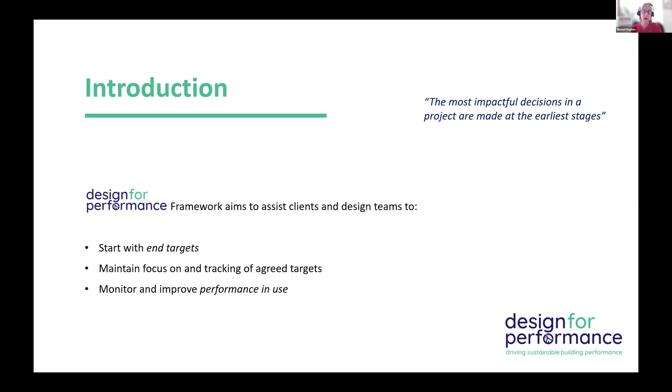By way of an introduction, the project is essentially about building performance and making key decisions at the earliest stages in order to set targets and have a considered approach for focusing on tracking, monitoring, and improving those performance targets for the full life cycle of a project.

By way of overview and introduction to the Irish Green Building Council, of which I am Director of Innovation, Irish Green Building Council have carried out a number of research projects and advising the construction industry and real estate sector on sustainability in the built environment. Some examples of our projects are Zero Carbon Roadmap, Building a Circular Ireland, which we just launched last week, looking at the circular economy side of the construction sector, and National Roadmap for Upskilling in terms of how we're going to meet our targets.

By way of delving deeper into the work over many years by the RIAI, as Kathryn advised, there's been a suite of sustainability advice, policy and guidance documents delivered by the RIAI, which concluded with the RIAI 2030 Climate Challenge and the accompanying suite of advice notes. All of these documents are available on the RIAI website. And this journey of addressing climate action and sustainability targets has now moved into this next stage of this Design for Performance project.

Focusing on the RIAI Climate Challenge, for those not familiar, the project has taken a life cycle analysis approach and focused on 4 key indicators. As Kathryn advised earlier, this includes embodied carbon, operational energy, water, and health and well-being, which is a combination of indoor air quality metrics. The goal with the 4 targets is to look at each individually, set a reduction target, and see how to achieve those targets.

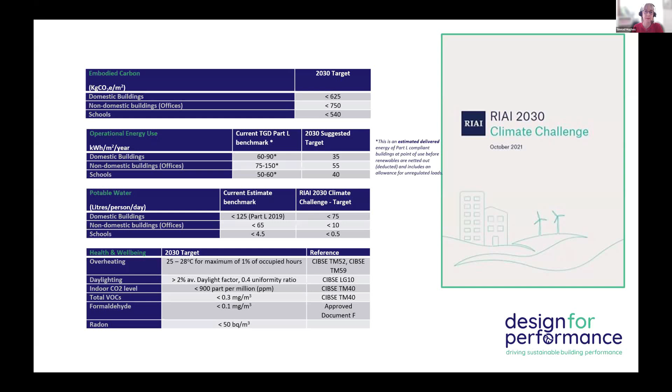So what is the Design for Performance framework? Essentially, the RIAI and IGBC have taken these 4 metrics and looked at them in further detail. The title was deliberately selected to encourage industry to move beyond designing for compliance only, and to look at the broader performance and actual building performance of a property.

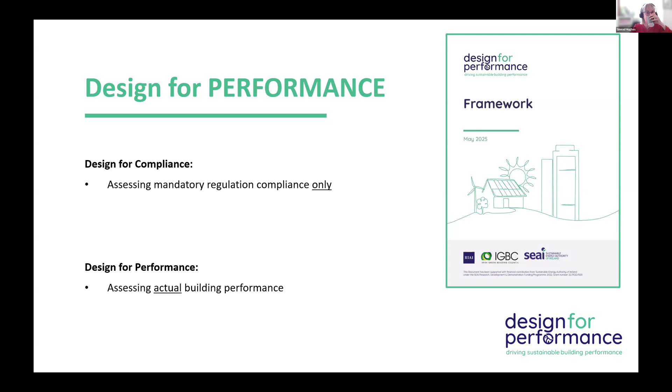In addition to the metrics within the climate challenge, we've also considered the EU Level(s) framework. For those not familiar, this is a European approach to asking the right question from the outset, looking at life cycle assessment and assessing the sustainability performance of a building. Again we're looking at the same 4 metrics from the RIAI Climate Challenge, in more detail at level 1, the early stage consideration; level 2, the more detailed design; and level 3, the as-built and critically the in-use performance aspect.

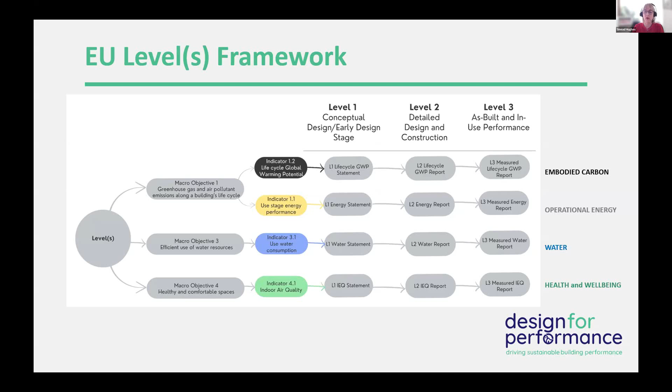Sarah later will go into more detail on the EU Level(s) framework. Essentially we're trying to bring a broader awareness to this overarching European framework in which we'll all be operating, with further detail to follow.

So what is the Design for Performance framework? Essentially it is 3 documents. We have done extensive research to see what is the most applicable way of conveying all this information and assisting industry in a project-specific approach, balancing broader-level advice while accepting that every project needs to be looked at on a case-by-case basis.

The first document is a work stages overlay. We started with a typical construction project, looked at the detailed stages, and critically who does what when. We have a guidance document, a Word document, to delve deeper into the specifics of the 4 indicators at each stage of a project. Then we have a dynamic tracker, an Excel document, suggested for industry to use and tailor to their own operations or to tie into other internal documents and processes. So that is a movable item.

I'll just talk you through briefly those 3 documents. The work stage overlay takes its lead from the RIAI Design for Manufacture and Assembly document, the DFMA report, which I'd urge you to look at, which looks at the work stages, currently 8 stages in an RIAI contract, and various metrics within each. We acknowledge the differential between public and private contracts, design build versus traditional, large projects versus small, residential, commercial, new build versus renovation.

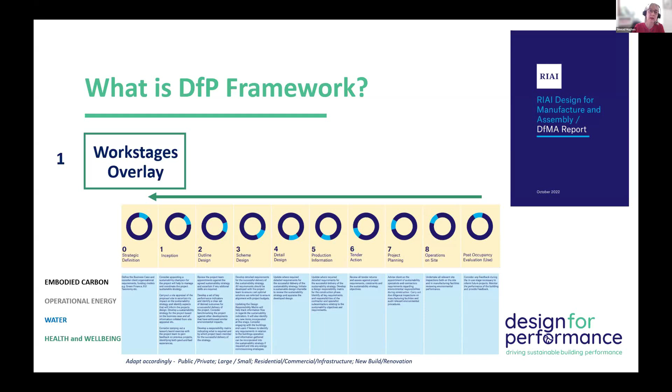The framework is a guidance document, essentially a word-by-word version to assist you in pulling together all of this information and understanding what is specific to your project and how to improve upon same.

And then finally, the dynamic tracker. Essentially, this is an Excel document on an indicator-by-indicator basis for you to look at the key action at each stage and assign responsibility in terms of having lead and support.

As Kathryn said, collaboration is key. We're delighted that the training sessions today are open to anyone in the construction industry, because this is key. We have huge climate targets to meet, and we really need to expedite this process and deliver in a faster, more efficient, and more collaborative way.

We acknowledge that there are certain risks and equally opportunities through the lifetime of a project's development, and it really is about monitoring and tracking those metrics and processes within that overall life cycle lens, and that is key. Just showing you a very high level overview.

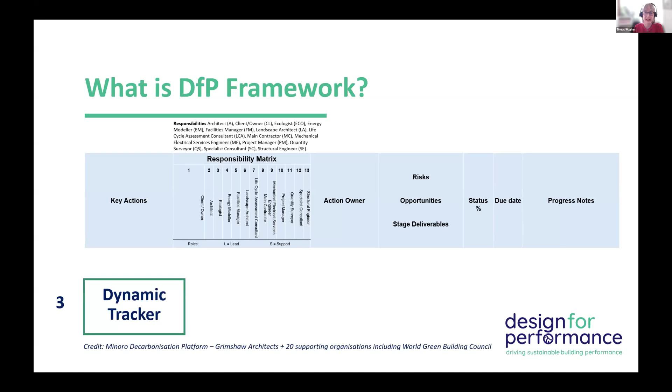The actual detail within the dynamic tracker - we wish to credit the Minoro decarbonisation open source platform information, which was designed by Grimshaw Architects and 20 organisations, including World Green Building Council. So, in the true sense of collaboration, we're not reinventing the wheel across the industry at a European level. The detail will be apparent within the framework when we go into that.

What are the benefits? The benefits are multiple on so many levels. Essentially, this is about target setting as early as possible and tracking that journey and continually improving, and seeing the benefits of a full life cycle analysis.

It's tracking, it's monitoring, it's verification. So collectively, we're looking at full performance life cycle analysis of a project.

Where to start? I know there's a huge amount of information, and this is a very high level overview. There's a wealth of detail in the documents to come, but essentially just start simple, start sharing, start learning, upskilling, doing courses. Even attending today - we're so thrilled to see the numbers attending.

Tracking the metrics, looking at your existing projects, tracking the metrics, collaborating with your design team, your clients earlier in the process. So really the metrics around each of the elements are continually on the table for continual review.

Really, it's a culture of collaboration. That is what we're trying to promote here today. So I'll leave it at that, Liz, and we can delve deeper into the documents next week.

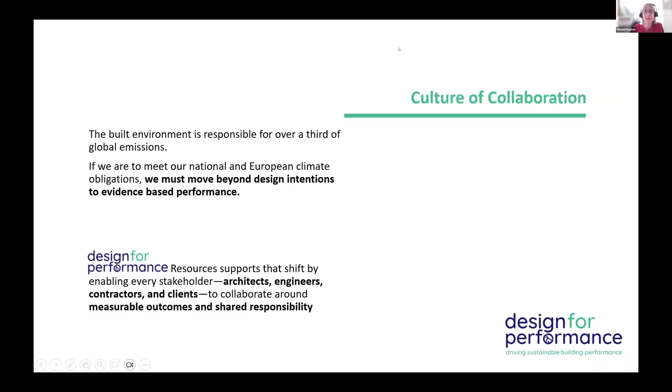So we're going a little bit deeper. I'm going to introduce Judit Kimpian, and the title of her topic is Beyond Compliance, Why Design for Performance. But before Judit starts, I'm going to give you a little introduction of who Judit is.

Judit is an architect and policy expert renowned for shaping EU sustainable building policy, with 20 plus years in architectural practice and as former Director of Sustainable Architecture at AHR. She has led pivotal research in building performance and net zero architecture. Judit chairs the Architects Council of Europe's Sustainable Architecture Group and contributes technical guidance to RIBA and CIBSE.

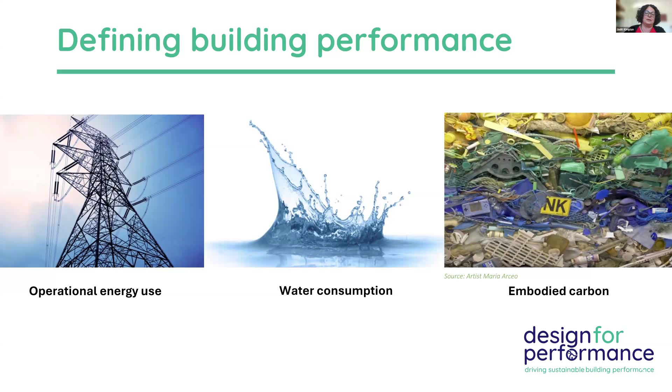And then what we want to see really is the quality of the built environment and the value that we create with these resources and at what cost.

And we want to be able to communicate all of this over a building's lifespan, effectively tracking from product stage to construction stage to use stage, end of life, and beyond in terms of recycling and reusing.

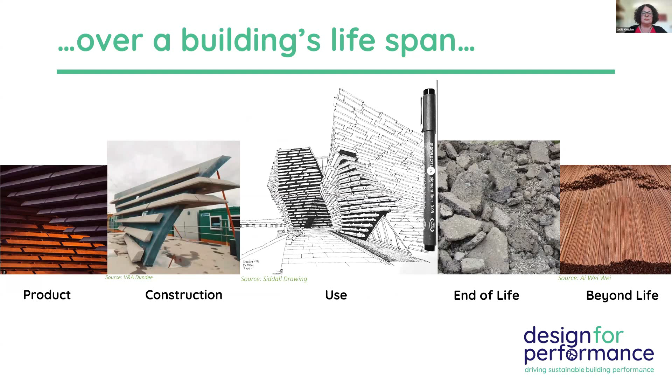There's a less visual presentation of this approach translated in the macro objectives and indicators of the Levels framework. Over the past decade, a lot of effort has gone into capturing these indicators.

So we really try to select the ones that have the greatest leverage, that by recording, monitoring and targeting specific indicators around these, we really incentivize sustainable design practices.

These were drawn from different sustainable design certifications and standards, but today Levels is really recognized for providing a common language for assessing and reporting on the sustainability performance of buildings. And Levels also underpins many EU policies and directives, including the Energy Performance of Buildings Directive, the CPR, the taxonomy.

And Design for Performance is very much based on this Levels approach to reporting environmental impacts. Sarah and Gary will both speak more about this in their talk.

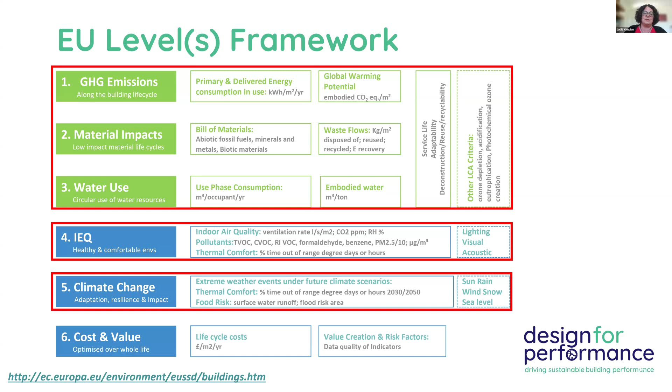So that's the resources that we're tracking against the indoor environmental quality, the climate change resilience, and the life cycle cost and value creation.

A1 to A3 is the product stage, then the construction stage - these two we call the upfront carbon - and then the use phase and the end of life phase.

So these all relate to the material and construction impacts, whereas the bit in B6 and B7 is the operational energy use and operational water use, which relate to the actual operation of the building.

Sarah is going to speak a lot more about this, but it's really important to have this in the back of your mind when we're talking about whole life impacts.

In terms of the breakdown of embodied carbon, it's really good to understand where these big impacts are. So usually we say that A1 to A3, the production phase, so the upfront carbon, tends to account for more than 50% of whole life carbon.

All of these figures are based on collected data, and we really emphasize over and over why collecting data and tracking these is so important, not just for the sector, but for individual projects. B2 and B3...

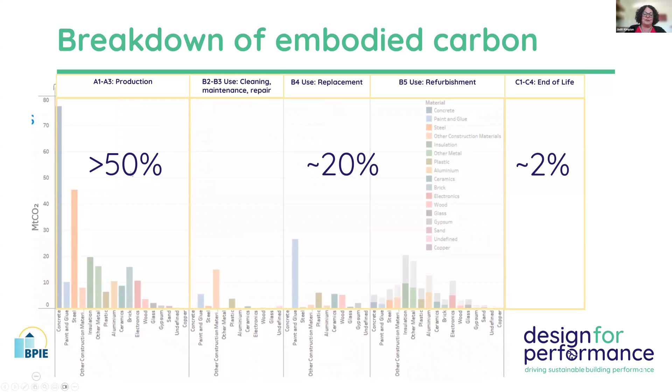Again, it's worth reinforcing the terminology briefly. Whole life cycle usually considers the environmental impact of a material or product over its lifetime, from cradle to grave. Module D, as I stated before, includes reporting on impacts relating to the reuse and recycling of materials and products, often referred to as cradle to cradle. When it comes to carbon, neither embodied carbon nor whole life carbon includes module D, so that's worth noting. The Energy Performance of Buildings Directive does require reporting this, but there are no limits associated with it.

The aim of the circular approach is to achieve zero waste over the life cycle of a building, reusing and recycling all the waste. Ideally, with sufficient design input, one project's waste can become another's resource, eliminating the need for costly production of new materials as well as waste.

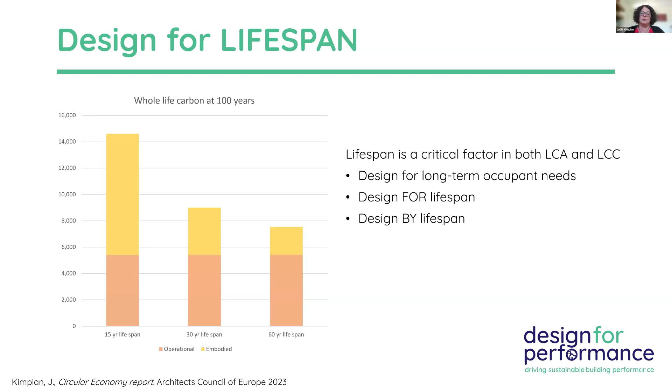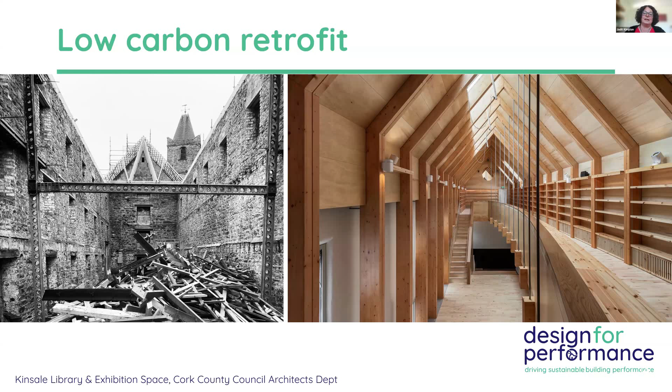My colleagues will be talking about this project in another module, but it's great to see built examples in Ireland showcasing the principles of design for performance, a fantastic project in Cork. Another great example is the deep retrofit of Tom Johnson House, the new headquarters of the Department of the Environment, Climate and Communications, undertaken by OPW Architectural Services. The achievements will be discussed by Edel Collins of the OPW on day 3.

Now I'm going to talk a bit more about operational energy use and related carbon emissions. This is the B6 emission stage that has sparked the most controversy, which has led to the development of another key aspect of design for performance: a move away from estimating energy efficiency potential of buildings towards targeting achieved performance in use.

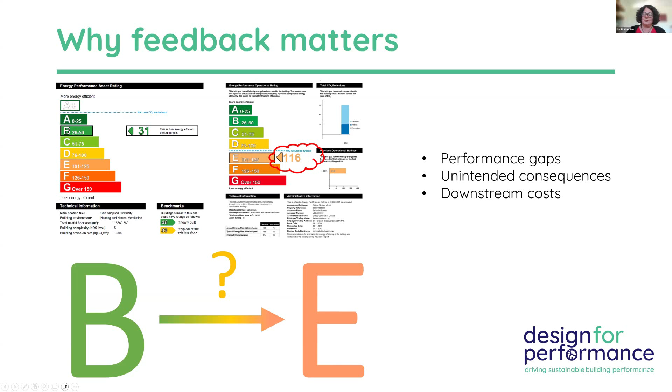So what you see on these two pictures is an energy performance certificate versus a display energy certificate reporting the operational rating. We found in the 2010s that there is a large discrepancy, and we started looking at the causes of this. What we realized is that in order to create these certificates, the industry didn't really want to be responsible for what we call user behavior - what equipment people put in buildings, the as-built factors, the operating conditions, occupancy patterns, hours of use, etc. So a kind of notional building was created for legislative compliance, which is a building under standardized conditions.

But what we found in the UK, and also in Ireland, is that these methodologies defining the energy performance certificate and the calculations - the DEAP and NEAP calculations behind them - actually don't relate to outcomes. And that's a really big issue.

I think what's fantastic is that the emergence of the Internet of Things has allowed low-cost wireless sensors to begin monitoring buildings in more detail, and doing this verification loop has become really financially feasible. More data is coming out about not just the performance gap, but ways of closing this. In this case, the data showed in the AMBER study that the schools analyzed had a performance gap of around 20%.

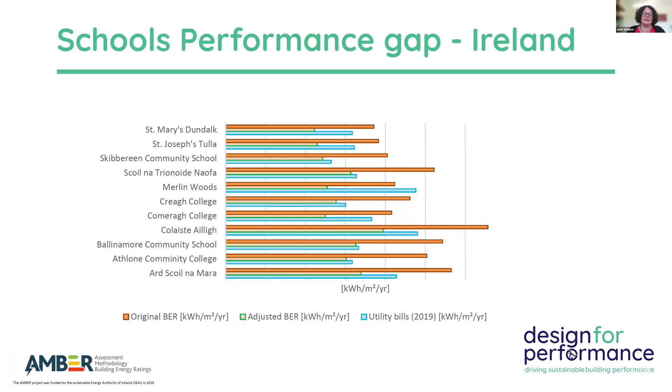And yes, it's worth analyzing the causes of that - I'm going to show a few more slides after. I just wanted to show you this other Irish study, Mind the Energy Performance Gap, which was testing the accuracy of building energy performance certificates in Ireland, showing a similar gap - really a lack of relationship - between the calculations and actual performance that was modeled to represent actual building conditions. That's kind of unsurprising, but it shows why it's so important to get a better handle on what actually happens in buildings.

One way of doing that is operational stage evaluations. So you do occupier surveys, building visits and interviews. You read the meters and sub-meters, ideally try to reconcile them, especially if they work well - not a common occurrence in my experience. You can also log quite easily indoor environmental quality meters, and what I do on every single project is thermal imaging, and of course blow door tests are mandatory.

But there are other instruments for building fabric checks too, so you can demonstrate whether the U values you designed and intended were actually implemented in the project. There were a number of research projects across the EU and the UK, and now best practice is considered to involve an as-built as well as an in-use check to effectively close this feedback loop.

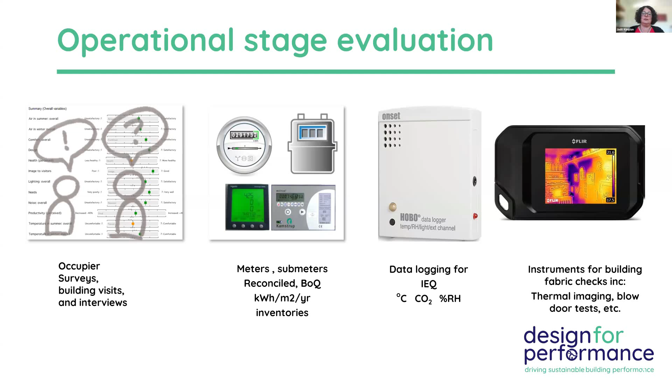So this is a quick snapshot of the RIAI's guidance, which shows that carrying out an as-built validation - as Sinéad said before - of how your employer's requirements translated into the build project is also a really good way to address any performance liability issues.

And so these as-built checks don't only help with quality control at handover, but they also ensure that the performance measurements you then do in operation relate to the actual building as constructed, and not the design - again helping with any liability issues, which are actually quite rare.

So crucially, because the commissioning is late on most buildings, the first year becomes the year of seasonal commissioning and adjustments. This is very common, especially for larger buildings, but not uncommon for homes either. And this is when the meters get reconciled, where all the set points and profiles are checked and adjusted, the openings are serviced, the manuals are finalized, and all the as-built information gets consolidated.

In the standard D&B contract, this period is usually extremely chaotic, and things often get missed, resulting in building underperformance. If outcomes form part of a contract, most of the issues are more likely to be rectified without adversity. This has been our experience on projects that have adopted this approach.

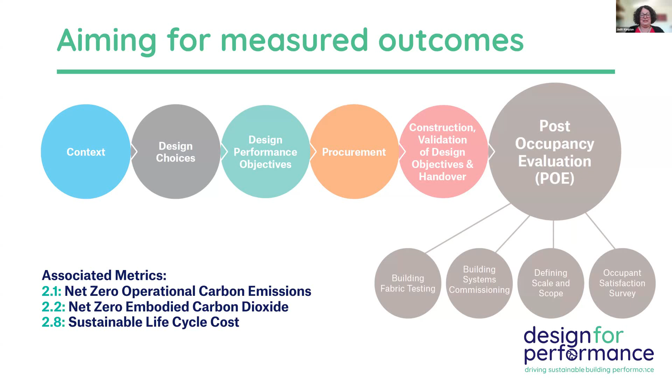So just to look at what these metrics mean in practice, and who is going to pay for all of this. Whenever I talk about this topic, I always emphasize that actually the question should be, why would anyone not pay for this evaluation, especially when they are planned in from the start of a project, so you don't spend a lot of time having to collect material data and information that's difficult to access, because you've prepared it upfront.

We know that without verification of the as-built and in-use energy and carbon metrics, buildings routinely underperform, and clients ultimately have to meet the extra cost of unused and underutilized equipment. This could be metering, building management systems, sensors, controls - sometimes amounting to between 2 to 5% of capital cost. It's a lot of things not to pay for, but not see the benefit of.

There's also the misplaced value engineering - fabric performance, air tightness, all the openings, floor to floor heights, thermal mass, entrance lobbies. All of these things, if they make a crucial contribution to the final building, and are value engineered ad hoc, that will compromise performance. And there are always increased management, maintenance, and energy costs.

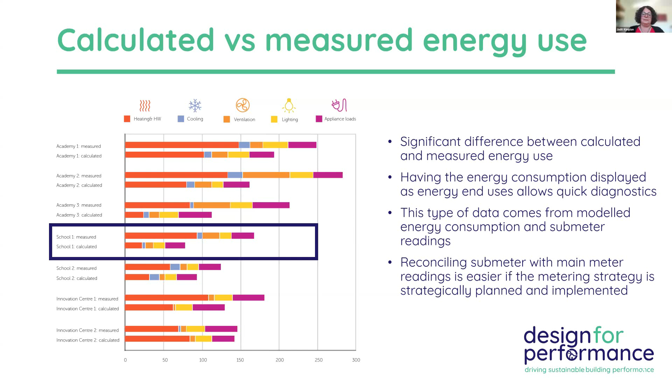I think what this offers is that you can have really quick and important insights. For example, the building highlighted there had really significant issues with heating and ventilation, and so we can start drilling down into what didn't work on those projects, on that particular energy end use.

And so learning from the projects that didn't work, for our next project, we worked really closely with UCL, IEDE, Institute of Environmental Design and Engineering. You might find that teaming up with academic partners at the start of this journey is really helpful, taking projects and building aspects of them offline. But what we just did a live project because we so wanted to see this work.

We embedded performance basically from the start of the project all the way to completion, and well into the defects liability period reporting. We basically set up a kind of golden thread of information. We called it the building performance register, where we don't just track the metrics, but also what kind of aspects of the design allowed the project to meet those metrics and limits.

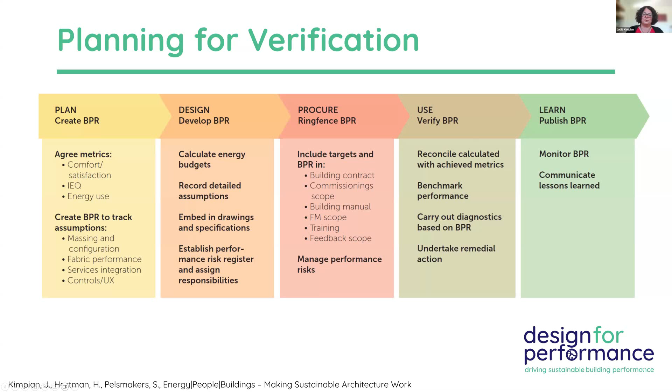From design all the way through, we ring fence it in the building contract, the contractor's prelims. It informed the FM scope, and then when you're in the use phase, you use it to verify that your targets have been achieved. It's very helpful when you want to do reports about what worked really well, you can go back to that same structure. So it creates a golden thread of continuity through the project, whereas normally in a more adversarial project setup, a lot of that information gets lost in the fray.

So we effectively follow this design for performance approach on the Civic Centre in the UK, working closely with the client to target an operational rating of A, which means measuring energy use, and we aim for less than 70 kilowatt hours per meter square per year for annual consumption, with about half of that offset by renewable electricity.

And what we found was that even with this approach, the building ended up consuming a third more than what we estimated in the first year, which is actually a really common occurrence. So you might find that 130% more of a low is still relatively low, but the discrepancy was high enough for the design team to take steps to address this performance gap during the defects liability period. The advantage was that all the key protagonists were still engaged and involved in the project.

So just very quickly, we started with a simple review, just collecting bills and certificates and interviews, visiting the building, reviewing its use and operation, discussing with occupants to gather feedback on what has and has not worked well. Occupants may also share their energy bills for review by the design team. Issues to review can range from systems to materials to occupancy patterns.

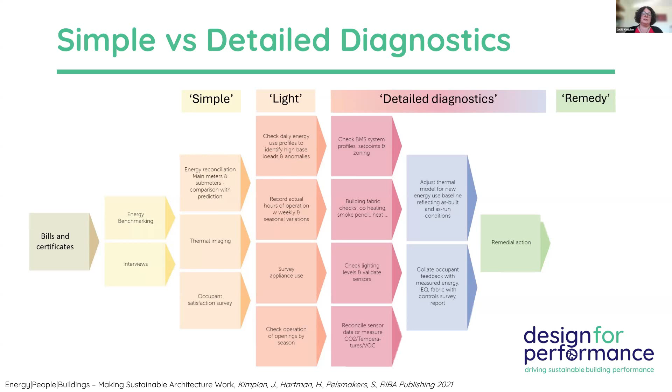I think the themes and issues to review should be really set at the start of the design process. And then if you find any major discrepancies, which we did here, then you look at the performance figures more closely, and you might want to engage an independent consultant to do this as per the RIAI's guidance. But we didn't go down that route because we had UCL's researchers working with us, which was super helpful.

But what we did do is go after the submetering data, so this energy end use data really early, and combined with the feedback received from the occupants, we could start the diagnostics very early on. And we could almost immediately see from the comments and from the energy results that basically the automated windows for night purge needed adjusting, they were opening too much in the winter, not enough in the summer. And the lighting controls needed adjusting. You can see here from the energy figures, the heating and the lighting were way out.

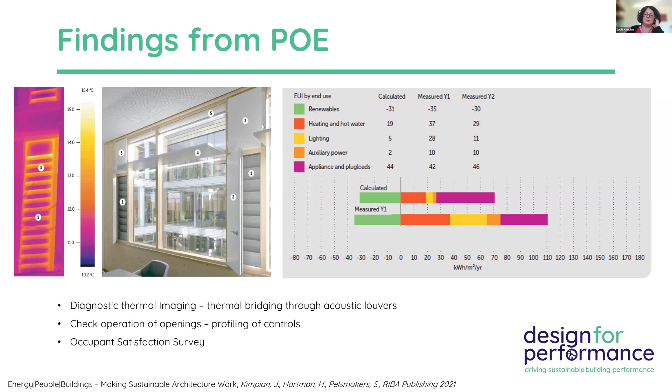And then we also found through thermal imaging that there was quite a lot of thermal bridging through the acoustic louvers. We could check the operation of openings and profiling of controls, and the occupant satisfaction survey also supported our findings. There was some thermal bridging relating to the ventilation openings, and very commonly night purge wasn't enabled in the naturally ventilated building, which is a problem for overheating in the summer. But once we addressed these control issues, or the contractor did, thankfully, for heating and lighting, we could see that in year 2, the consumption was much lower.

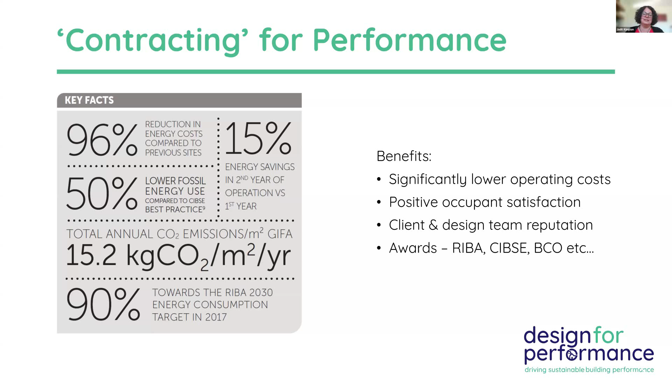Albeit the heat pump recommissioning was still planned when this data was captured, I think what we found was that this way of contracting for performance really helped align project team incentives. We effectively ended up setting up a less adversarial and more collaborative project, and ultimately this delivered an award-winning headquarters for the client on time and on budget, with a 96% saving on energy bills compared to their previous sites.

Liz kindly mentioned my book on this topic. What we find is that it's extremely difficult to find projects that have both the data and are inspiring in terms of design. What we think of as climate-ready architecture is being able to show fantastic architecture together with achieved performance figures, both embodied and operational, in case energy consumption, but ultimately more broadly, including indoor environmental quality, water consumption, as well as design performance prescribes. Ideally, we'll get to a point where this is done effortlessly, mostly through automation.

So just to reiterate the benefits of verification: for the client, there's the accountability for quality, and that's quite a big challenge in some cases, and the big bonus. There is a layer of cost control that helps stop undermining or compromising quality and achieving expected performance outcomes. That can't be a bad thing for any client. Lowering maintenance costs, better user experience, and long-term building resilience are all really big bonuses.

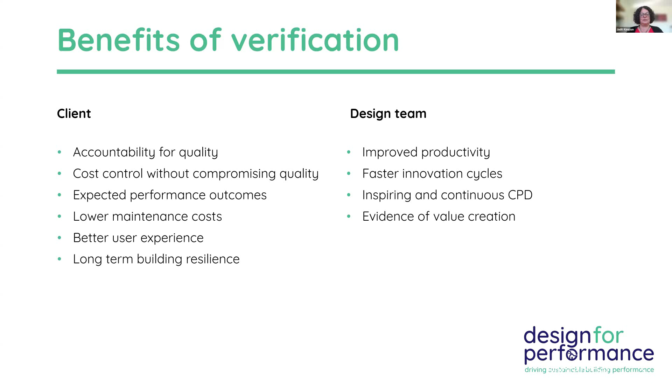And for the design team, obviously the improved productivity and faster innovation cycles. We also found that it's such an inspiring way to do CPDs. There's nothing like being able to go back and revisit all the things that you designed in the building and seeing it in practice, noticing the things that don't quite work as you expected. Big learning experiences. And in terms of business development, being able to evidence your value creation. There's a fantastic Danish publication about architects documenting their value creation, but it isn't just for architects, it's for the whole construction sector. Traditionally we could be better at doing that in the future.

So just key takeaways: whole life carbon limits and verification, so design for performance supports a transition to true circularity. We're trying to get to a point where we really don't have to worry about the impacts of construction, and construction begins to—we can kind of relax a bit more about efficiency and just focus on creating environments that are healthy and regenerative. Then design for whole life versus practical completion, which offers direct and long-term business benefits, which I showed before.

And also some practical challenges in the short term, because it's quite a lot to absorb, as Sinéad was saying. As Sinéad says, start where you can. You can unlock opportunities for your business through learning and innovation, but start slow if you can. Partner with academics or researchers or even students—it's a really great way to come up with new solutions that we so desperately need to progress the sector. Data is power. Okay, thank you so much.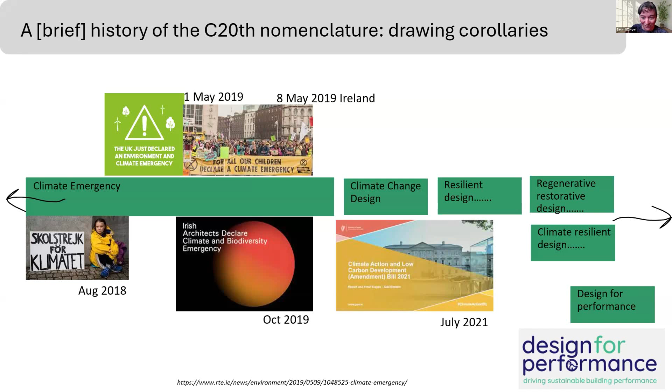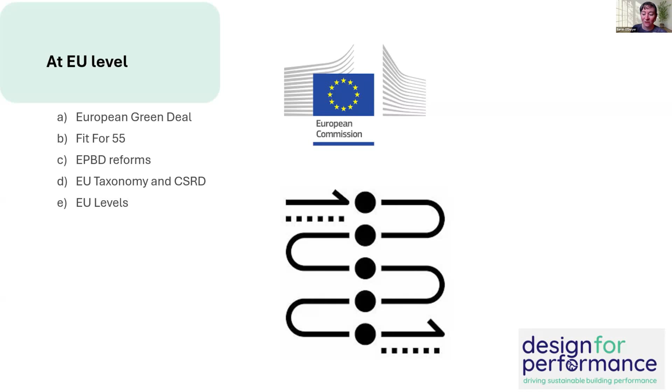One is the European Green Deal, which the Fit for 55 package comes from. There are the upcoming EPBD recast reforms. There's the EU taxonomy and EU levels. The EU, I suppose, there's one of these you're going to find mentioned across nearly every presentation, and that's EU levels. I know Gary will pick up on the EPBD reforms and recast after me, and Eoin after that will be talking about the financial end and the role of the taxonomy. So it's no harm to hear about this now a little bit, and then your knowledge of these will be reinforced and built up throughout the different presentations.

Taking these in turn, the EU Green Deal was a really integral part of the current EU Commission strategy. There's a UN 2030 agenda, which is also linked back to those Sustainable Development Goals. So all of these things build on each other and tweak on each other. The EU is a bureaucratic agency, so there's a plethora of different commissions, committees, policies and documents. You're trying to get your head around what they all are, how they're connected, and how they build on each other, essentially.

The EU Green Deal is essentially a roadmap. It sets out the target: the EU is to become the first climate neutral continent, with the goal to do that by 2050. It also, going back to this holistic thing, talks about more than just numbers and energy. It's about protecting human life, protecting animals and plants. It's got that biodiversity or landscaping aspect to it, that non-human species aspect to it.

It's also about helping economies and companies to be world leaders in things like clean products and technologies, and also this idea of the societal end, making sure these improvements are available to everyone. So you might have heard of a just transition or an inclusive transition.

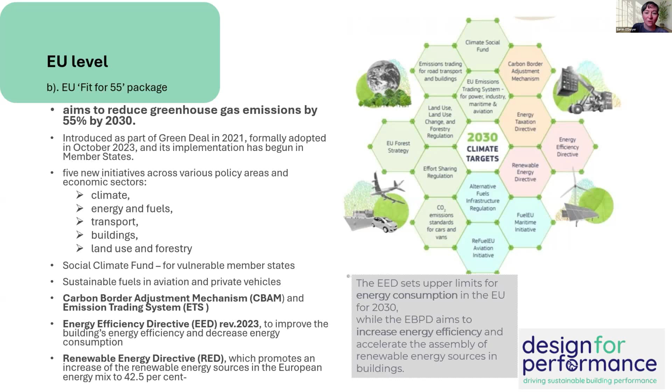There's a lot in that, so again, come back to this as a reference point. You're not anticipated to be able to hold on to all of that in your brain, but just know that there is a spectrum of things there.

Then I suppose the big one in terms of what we're talking about, in terms of newness, and going back to what Judit was mentioning about embodied carbon, this is the EPBD recast, which will be the next big pusher and player in this. Again, it's interesting to look back at where we've come from. But the majority of you are architects, majority of you are working on building projects from what I can see, so you'll be very familiar with the EPBD up to this point.

I guess the idea is always that it's kind to improve things, bridge gaps, increase standards, push things further. The recast that was adopted and published in May 2024 is another step in that journey. It relates back to the overall objective of the EU Green Deal, that 55% by 2030, so this is just one piece of that puzzle.

We have until 29th of May 2026 to put this into national law. The big takeaway, I suppose, will be this movement to yet another acronym. We've had nearly zero energy buildings, and now we'll be moving to zero emission buildings, or ZEBs, the new target. From 2028 that impacts public buildings larger than 1,000 square meters, and from 2030 it's for all new buildings. So it's the same stepping stone approach we've seen with other recasts, starting with public, moving to new, and eventually to all existing buildings.

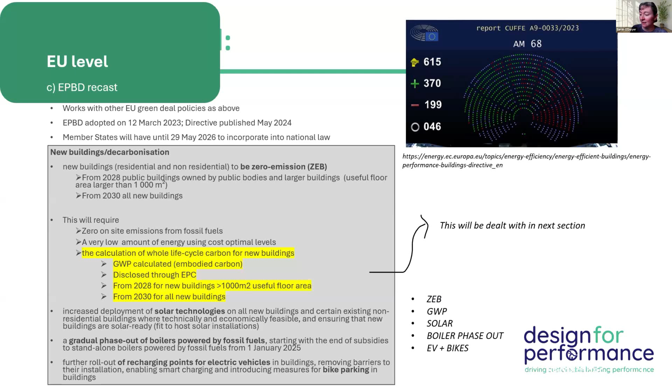There's also some provision within this to increase use of solar, to gradually phase out fossil fuel powered boilers, and also to increase infrastructure for both electric vehicles and electric bikes. So in bullet points, the main things are the zero emission building target, the introduction of the global warming potential calculation, solar, boiler phase-out, and EVs. There's a lot in it, and as I said, we have until the middle of 2026, so only a year, to put this into law.

It came up in one of the questions earlier about some other aspects to it. There's also a big move, which comes from the Fit for 55 package as well, focusing on existing buildings, which are becoming - I'm sure you're experiencing this too - an increasing part of the work of an architect, the retrofit and refurb of existing buildings rather than new. It ties into lots of different aspects like circular economy, etc.

So there will be, again I'm not going into the detail of these, just flagging it, an introduction of minimum energy performance standards for non-residential buildings, with triggers or thresholds associated with the lowest performers within the mix of buildings in the country. There'll be a binding target to increase the average energy performance of the national stock by 16% by 2030 compared to 2020, and up to 22% by 2035.

So essentially what that's saying is taking stock of the existing buildings in Ireland, identifying the worst performing, and figuring out how we can improve its performance by 2030. 2030 is fast approaching, and I suppose that's a little bit daunting, because for a building project, you might be well into a process now that might be delivered close to then. Although 2030 is 5 years away, it's actually quite immediate for us all in our workflows and how projects work.

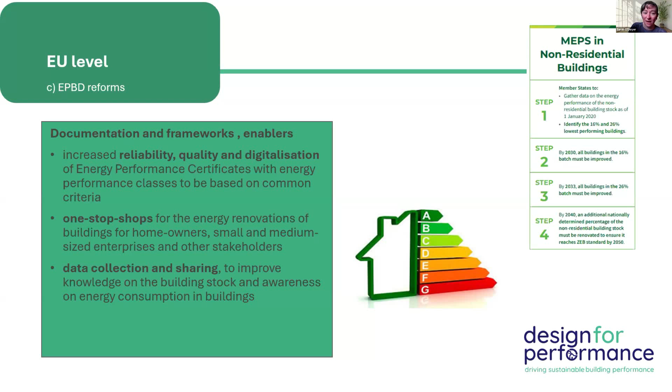So we kind of know what the targets are in terms of what, as an Irish government, it's supposed to be doing under the EU directive. We don't have a huge amount of detail yet on what that looks like in practice. As I said, Gary is going to talk through the SEAI's current national methodology for global warming potential in the next session.

So the fourth one of these is the EU taxonomy. Again, others will talk about this, but just to know that it is binding, though there's been a little pushback. France, for example, in January 2025 asked that they could not meet some of the requirements because it goes into so many industries and it is so difficult to translate the requirement into practice.

I don't know if anyone has been working on projects trying to align with this who might have experienced that. Essentially, what it's trying to do is categorize economic activity into assessing whether it's environmentally friendly or not, or how sustainable it is. It has a series of objectives, and criteria associated with those objectives. As a business, practice, project, or any economic activity, you basically assess your activity against those objectives and report on whether you can say you're aligned with the EU taxonomy or not.

It also has this aspect of the CSRD. I had to go to the next slide to remember what the acronym stood for, but it's the Corporate Sustainability Reporting Directive. So this is the way that companies disclose how they meet or align with the EU taxonomy.

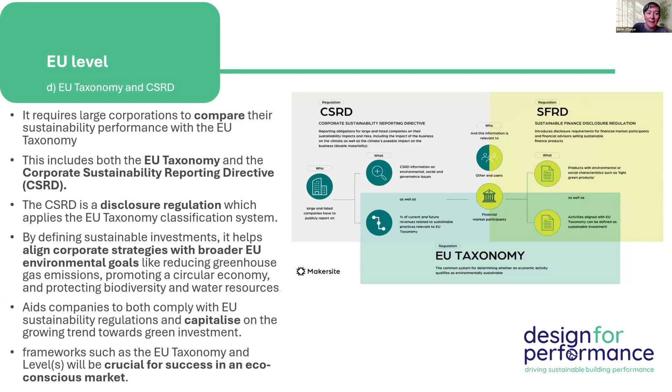But from everyone I've spoken to who's been trying to work with it, the translation of the overall aim and criteria down into practice can end up a little tick-boxy. How it actually translates into real on-the-ground practice, or into your day-to-day work, is, I think, still quite abstract for a lot of people. Happy to take comments or questions on that.

And then the last one, again a big one, is EU Levels. So it's worth stepping back: EU Levels, when it was first introduced, was essentially an environmental assessment method, a way to offer the same language and a unifying guidance for how to measure and design for a range of sustainability criteria, and how to measure them consistently.

So the 'levels' in the name refers a bit to the leveling of the playing field, or the leveling of the criteria. It also refers to the different levels at which a practitioner can engage with it, because you can do it just qualitatively, looking at the guidance as best practice, or engage with it quantitatively, following its suggested metrics and methods, and then take it a step further into monitoring.

So it is designed a little differently to other environmental assessment methods, by which I mean things like BREEAM, LEED, and the HQE. It's designed to be a design tool, a design aid, not just something you use to check if your building reaches a certain badge at the end. It includes core sustainability indicators, has really comprehensive manuals that are free to download and free to access, and it's very strong on circularity.

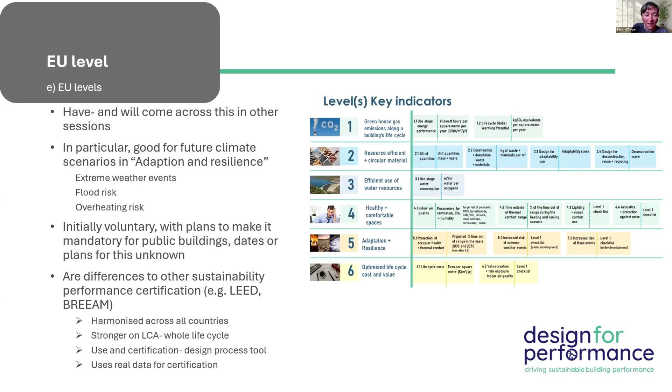So it's definitely worth checking out. As I said, you will come across it in lots of the different sessions, if not all of them, and they do give key indicators, key metrics, ways to kind of look at it. It's also a way to show, going back to the EU taxonomy, they use green levels. So if you're doing stuff in line with EU green levels, then you're thought to be meeting or aligning with aspects of the EU taxonomy. So it's all bundled in together.

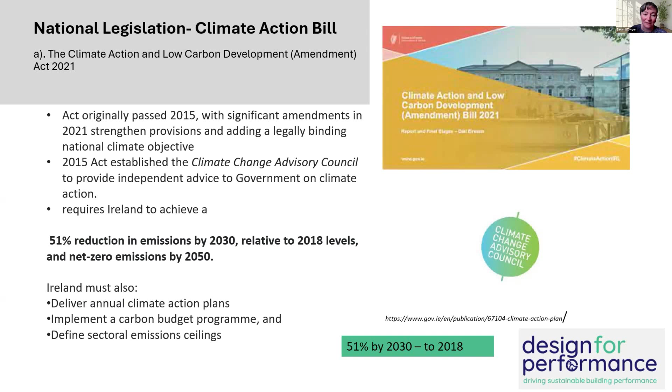So as part of the Climate Action Bill, the government is charged with producing climate action plans each year. They're released annually, usually in January. These set different plans and targets for the coming year in order to meet that overall goal of 51% by 2030. So each year kind of ratchets up and takes stock of what has happened in the previous years.

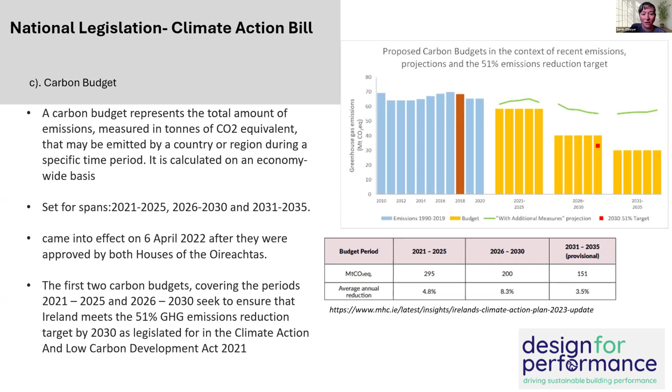A big part of this, at least in legislative terms, is the associated budgets with each of the 6 vital sectors that have been identified. We're actually just heading into the middle there, the second tranche of budget, so that's under review and consultation at the minute. The budgets were set out initially, but they're under review now because we're heading into that second period, the 2026 to 2030. The idea is that each sector will have a budget associated with it. Those sectors are electricity, transport, commercial and public buildings, residential, industry, agriculture, and then there's an other.

If you look at what the 2018 emissions are and the corresponding reductions anticipated, they don't always align. So there is a bit of politics at play here. Agriculture is the biggest emitter but has the lowest reduction to meet, for example. This is no shade on farmers or agriculture, but just to know that it's not just about the pure numbers—there's politics behind these. Forestry and land use, for example, still has no associated reduction number, because we're still discussing and liaising what that should be.

So there's lots of these that will have an impact on your work. I suppose it's a little abstract, but just to know that all of the things we're doing as an industry are contributing to, or not adding to, whether or not we meet these targets—these buildings, transport, and residential buildings targets.

And then just a little bit on the climate challenge, because I know we've discussed it—it's just two things I want to point out. One is the scale of the reductions in comparison to our current Part L that the climate challenge sets are quite significant, looking at between 40 and 60% reductions. The other thing, and it came up in the questions, is that it includes both regulated and unregulated loads, or what's called plug loads. So all of our legislation to date has not dealt with the unregulated or plug loads. The climate challenge includes those, so the challenge is even more.

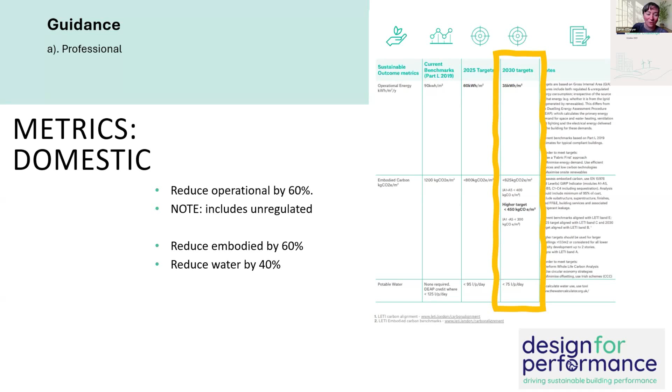So just to note that there are targets given for domestic and non-domestic, and I also want to emphasize—I'd be curious to know what puts people off from engaging with this—that the idea is it's a challenge, so it's not intended necessarily that you're going to meet these, but that you're going to challenge yourself to try to. So just to note, I think there's a fear that if you sign up to it, you're going to be somehow liable for not meeting it. But it's just something to think about and maybe discuss further in the Q&A.

The key takeaway would be: if you only do what you're currently legally required to do, it's not going to be enough. We really have to majorly move away from a business-as-usual approach. All of this is overwhelming, and I'm very aware of that, but every small action really is worth doing. In terms of legislation, look at your preparedness for that legislative or policy change. Are there areas of your own business that are going to be impacted, and what can you do now to prepare for that?

All of those binding international agreements progress really slowly, but they do build on each other. Although it might feel abstracted or unconnected at that high level, all of our daily working lives contribute towards achieving those. I always prefer to talk about opportunities and empowerment rather than shame and blame when it comes to climate issues. So even looking at how they work is a process that maybe you could adapt. You could set a target, evaluate how you work, diagnose what's happening, try and take action, and try and reduce, and keep repeating that cycle in every way that you operate.

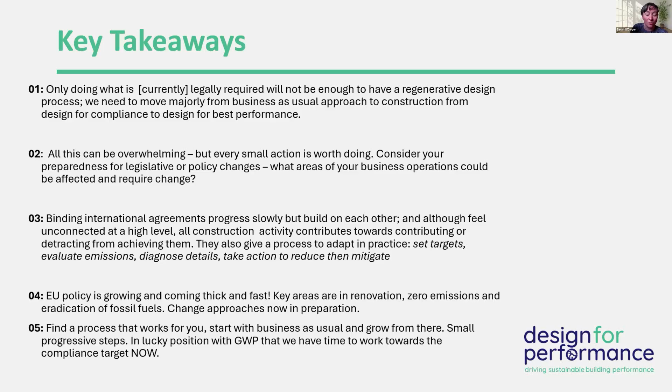We're in a kind of lucky position now, particularly with global warming potential. We've got time to work towards what we're going to be asked to do now, in a year's time, or it'll be enacted in a year. I'm going to leave it for Gary to pick up there in terms of what the national methodology for how we're going to deal with that GWP aspect will be.

Thank you, that's lovely, that's great, Sarah. My next stage, I'm going to introduce Gary O'Sullivan from SEAI, implementing policy life cycle global warming potential calculation methodology for buildings. But before I do, I'm going to introduce Gary. So Gary is the Programme Manager for Embodied Carbon with the Sustainable Energy Authority of Ireland. He is responsible for the development of life cycle global warming potential calculation methodology to meet the requirements of Article 7, Annex 2 of the recast EPBD, Energy Performance of Building Directive. He has extensive experience in certification of construction products against CPR, along with Agrément certification of innovative construction products. So Gary, I'm going to let you take over if that's okay.

Hey, thanks Liz, and lovely, thanks for the opportunity to present today. My presentation is going to be on the life cycle global warming potential calculation methodology, which is a new requirement under the recast EPBD.

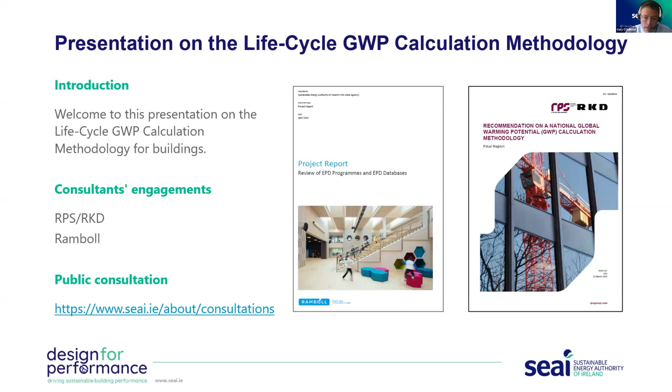So over the last year or so, we've gone out with an RFQ to engage consultants to assist with the development of life cycle global warming potential calculation methodology and the necessary inputs, the data that will be fed into that calculation engine. We engaged Ramboll to assist with taking a review of the inputs and the various databases available there in terms of environmental product declarations to be fed into the calculation method. And RPS and RKD were engaged to assist with the development of a calculation methodology.

We concluded that work back in December, and subsequent to that, there has been work done across Europe on a guidance document, which I'll go into in a later slide, called the Delegated Act. We've used the best from Ramboll's report, RKD's report, and the trajectory of the Delegated Act to develop our own manual, which is the Life Cycle Global Warming Calculation Methodology. All three of these documents are currently available on our website, and we're engaged in a public consultation looking for feedback on those documents.

So first of all, it's to raise awareness of this new requirement for life cycle global warming potential, also referred to as whole life carbon. It's an assessment of carbon emissions along the full life cycle of a building. It includes both the operational and the embodied carbon emissions. And it is now going to be a mandatory requirement that this figure is disclosed on the EPC, the Energy Performance Certificate for buildings.

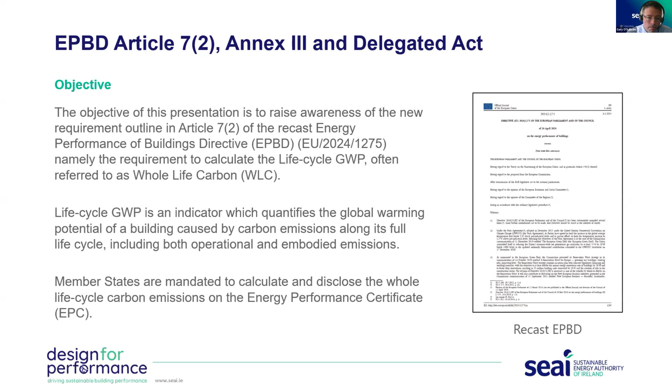So just to set a bit of background on where this has been driven from. Across Europe, construction industry is responsible for approximately 36% of greenhouse gas emissions. This stems from construction, usage, renovation, demolition. In Ireland, that figure is 37% of annual greenhouse gas emissions.

And under the European Green Deal, which was published back in December of 2019, it established an action plan to move forward to a clean, circular economy, whilst restoring biodiversity, cutting pollutants, and reaching climate neutrality by 2050.

Under the EU Green Deal policy, the Fit for 55 package and the Circular Economy Action Plan were two initiatives that were particularly relevant to the construction sector. Under the Fit for 55 package of legislation, there's a requirement for the union's carbon emissions to be cut by 55% by 2030.

And that compelled a revision to the EPBD, which was processed and adopted in April of 2024. Article 7.2 requires the life cycle global warming potential calculation, and as I said previously, a requirement to appear on the EPC.

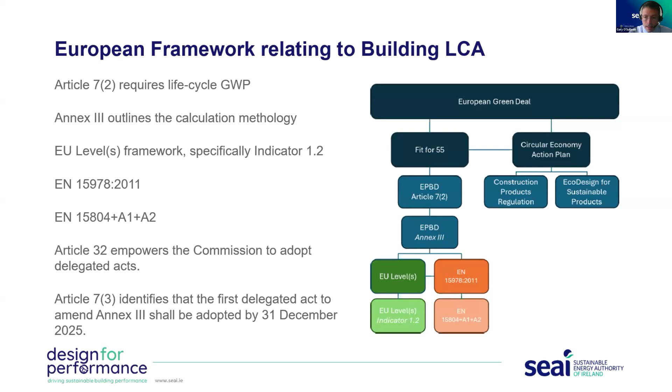So just to give a little context in terms of timelines, we are currently out for public consultation on our best estimate of a global warming potential calculation methodology. The delegated act, as I said, comes by the end of this year. It's actually December 2025.

In January of 2027, we must, as a nation, notify the European Commission of a roadmap to introduce global warming potential calculations. We also need to notify them of how it is we're going to collect information to inform that roadmap, with a view to setting limit values by 2030.

So under the recast EPBD, there's a requirement to produce life cycle global warming calcs for buildings in excess of 1,000 square meters by the 1st of January 2028, and for all new buildings as of the 1st of January 2030.

So we have in one band of European directives, we have the recast EPBD, but we also have the CPR acquis process, which is happening in parallel. And the CPR acquis is the construction product regulation. Heretofore, the construction product regulation mandated for 7 essential characteristics of building materials, and it looked at various different performance indicators such as strength, fire, robustness.

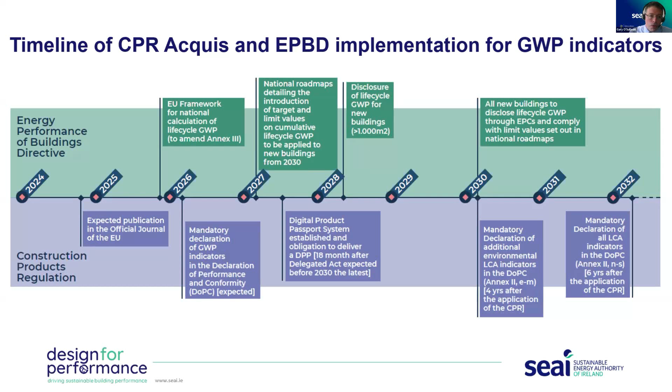So again, it's about the measure of the operational and embodied carbon, the whole life cycle emissions of the building. And EN 15978 outlines the following modules and phases and stages of the building life cycle.

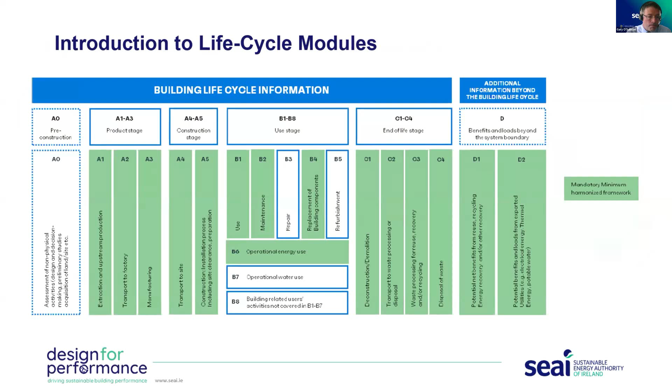The first phase is the production stage, and it looks after the embodied carbon of the manufactured materials. It looks at extraction, transportation to the manufacturing facility, and the manufacturing process itself, and quantifies the greenhouse gas emissions associated with that phase.

The next phase then of the calculation is dealing with the construction stage. Again, we're looking at transportation of material to site and the embodied carbon associated with the construction phase of the building.

The next phase is the use phase of the building. We're looking at maintenance, replacement and repair, and in particular, this module considers the operational energy use. So the BER, the Building Energy Rating, will factor into this module of the assessment.

Under the EPBD, the design life of the building has been given a 50-year duration. So we will be taking the operational energy and multiplying it by 50 years if it is a solid fuel or a liquid, or if it's electricity, we will be applying, in line with the SEAI statistics team, a grid mix to that electricity, and we'll be looking at forecasts and projections for a decarbonised electrical grid on a downward trajectory, prorating that out over the 50 years to encapsulate the total embodied carbon associated with the use of the building over its 50-year life.

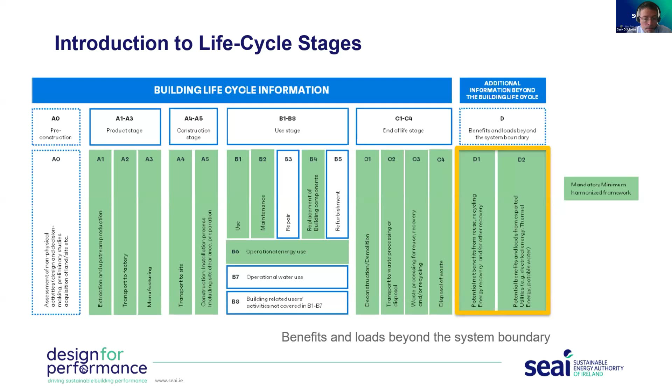So what are the units? The units are kilograms of CO2 equivalent per meter squared of useful floor area. That's the value. And under the Kyoto Protocol, it identified 7 greenhouse gases which are the most significant contributors to global warming, in particular carbon dioxide, methane, and nitrous oxide being the most significant.

So in generating an environmental product declaration for your materials and products, it assesses the impacts of all of these different greenhouse gases and converts it into kilograms of CO2 equivalent, which then allows us to do a useful, meaningful calculation to establish the overall global warming calc for the building.

So I've spoken there about the timelines under the recast EPBD, and it's not falling due as a requirement till January of 2028.

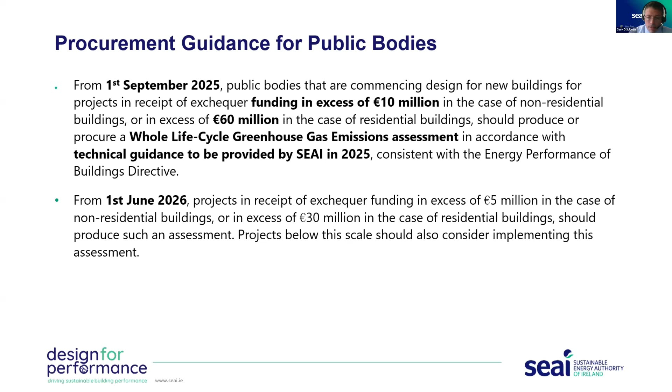But there is a CAP action, Climate Action Plan action, that makes it a requirement for publicly funded projects in Ireland, as of the 1st of September this year, that non-residential projects in receipt of exchequer funding in excess of 10 million, and residential projects in receipt of exchequer funding in excess of 60 million, will be obligated to produce life cycle greenhouse gas emission assessments for their projects. That requirement will reduce down, come the 1st of June 2026, to 5 million in the case of non-residential buildings, and 30 million in the case of residential buildings.

Okay, so next to look at the inputs and the data. It's important that the data remain transparent and the results are comparable, and that the calculations and data are available at an early stage of design.

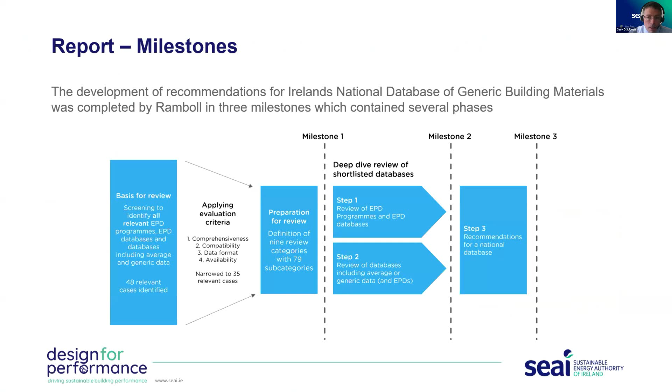To that end, we engaged Ramboll in conjunction with Jane Anderson to do a review of databases across Europe, various different EPD providers and databases and the like, reviewing what is available in terms of EPD databases, how they were structured, and the data quality. There were about 48 databases in total, of which 35 were shortlisted during a deeper dive into the quality.

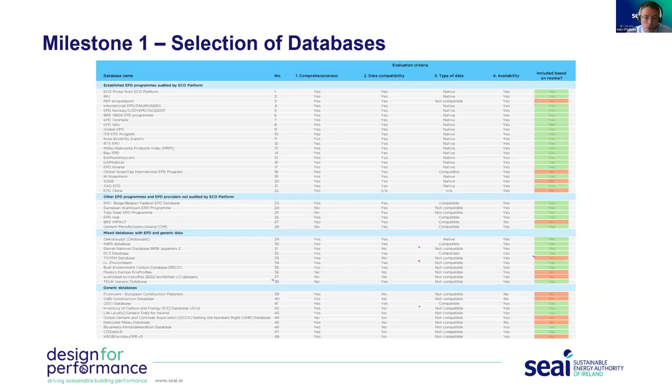They looked at the Eco Platform database, the OkoBaudat, which is the German database, and the EC3 database, which is a global database of building materials, and compared the good and the bad, shall we say, of all of these different databases. The EC3 database has over 25,000 different products contained within it, while the Eco Platform has somewhere in the region of 19,000.

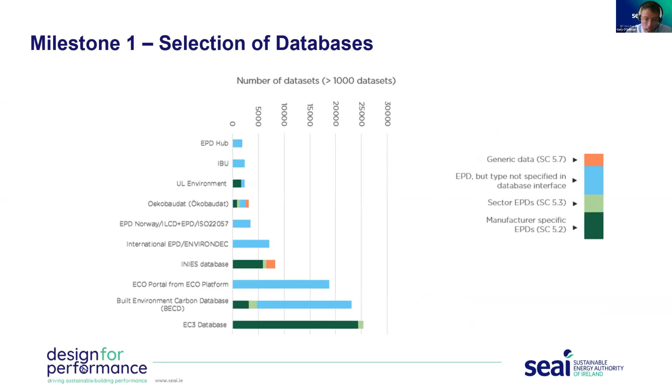They looked at the structure of all of these under various headings and categories, and came back with recommendations on how we should move forward as a country. The primary recommendation was that if product-specific materials already exist on existing databases, we shouldn't duplicate that work. We should develop criteria to identify the suitability of different database providers, which we'll get onto in a later slide. Ultimately, the recommendation was to generate a generic database of environmental product declarations that can be used at early design stage when product-specific information isn't available.

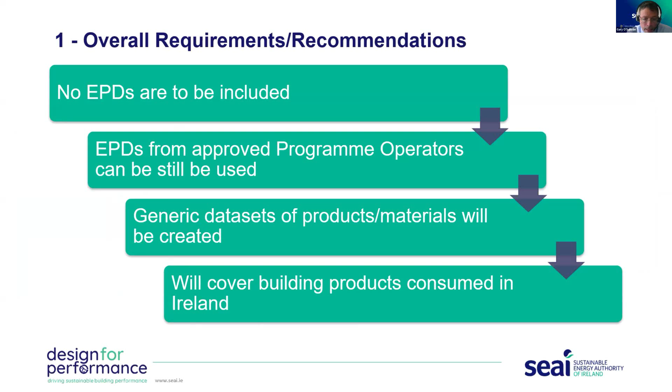So the recommendation was not to include EPDs in our database, but to have generic data sets for products. To that end, they presented us with the following slide, which was the hierarchical approach to establishing environmental impacts.

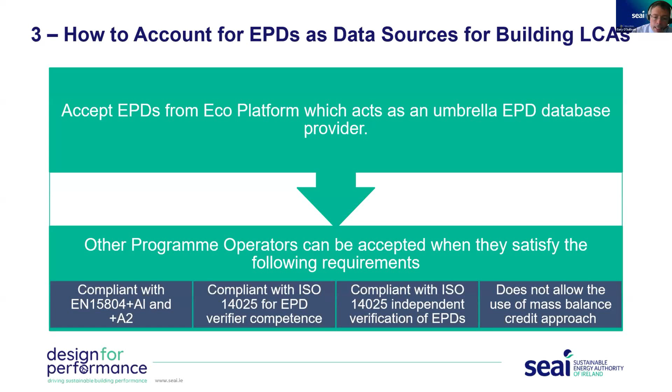Eco Platform carries out an auditing process. They check that program operators comply with EN 15804, that they comply with ISO 14025 for EPD verifier competence, and for independent verification, and that they do not accept the use of mass balancing credit approach. If a program operator can satisfy SEAI that they have all these measures in place, then EPDs contained within those program operators would be deemed suitable for use in Irish life cycle calculation submissions.

Just to move on to the calculation methodology. As I said earlier, we have new buildings in excess of 1,000 square meters for 2028, with limit values to be set by 2030, applying to all new buildings by then as well. So we need a common, transparent - and I think transparent is the important word here - calculation methodology, something that's readily audited by anybody. At all stages there needs to be clarity on the inputs, what's been included and what hasn't.

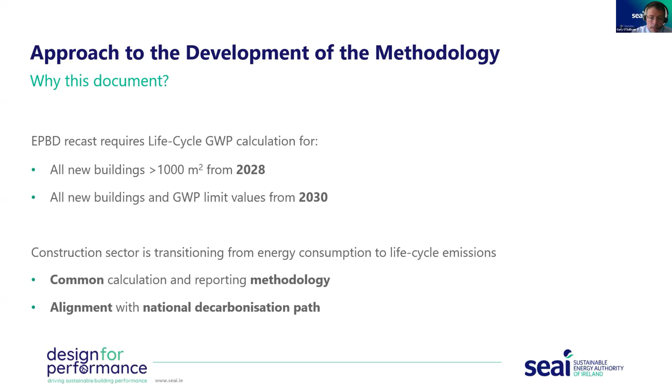As part of developing our methodology, we referred to several publications, the RICS manual being one, the IStructE manual, and various articles, taking the best of all these documents in conjunction with recommendations made by the RPS-RKD consortium and Ramboll. We started off building on pioneering work done in the country by the Irish Green Building Council on the Indicate project, complementing it with more robust, developed approaches outlined in the RICS and IStructE manuals.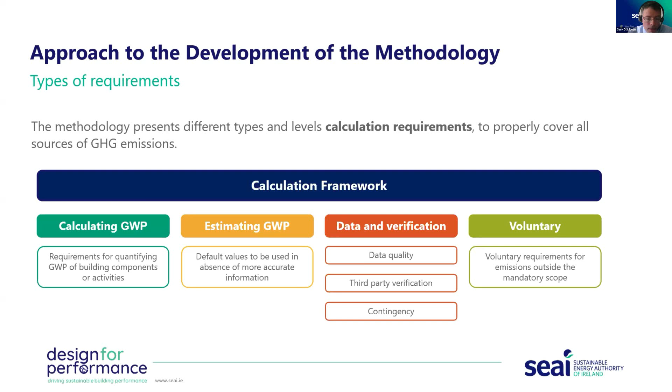Our approach has been to simplify, but be inclusive and transparent throughout the calculation process. In essence, the calculation is quantity of materials multiplied by indicators to give the building life cycle analysis. The use of... sorry, let me just go back there.

It's important that we have the figures in the national database at an early stage that will allow practitioners to do a first pass assessment of their projects, so they can do a comparative between different potential schemes. In terms of structure, say if it's comparing a reinforced concrete scheme to a steel deck solution versus a hollow core solution, to inform the design team at an early conceptual stage as to what scheme will arrive at the lowest embodied carbon.

In our methodology, we have outlined approaches on how to handle each module to the best of our ability. To that end, we could take one particular module, the A4 module on transport, and we came down on the RICS approach based on the recommendations from RPS-RKD, which takes transportation carbon factors multiplied by transportation distance, but also includes a factor for the empty returning journey of the trucks, and the materials mass, to give the embodied carbon emissions associated with the transportation of materials to site.

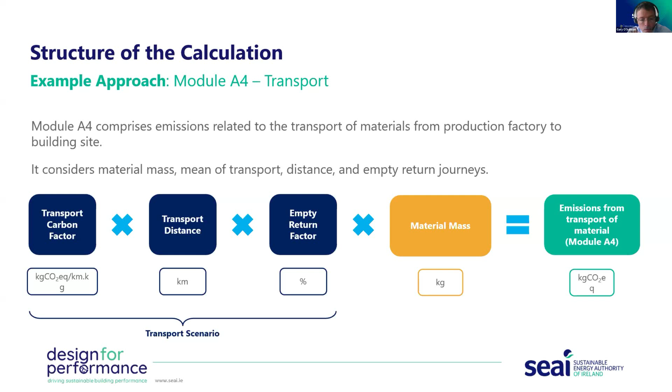We took the best of what we could find out there in the market, and we did a position paper on this. We looked at the transportation modules contained within the RICS manual, and we plotted them on a map of Ireland. On the left, this was the 4 transportation options available in the RICS manual, and we felt we would add an additional module here to give better coverage to the Irish market.

Now, this is just transportation by road. Our global warming calculation manual also has transportation by sea and from Europe - there's 2 additional modules. So there's 7 different default transportation scenarios available for an initial pass, and they would be assigned in the database of generic building materials. We will assign them to the material types, so that will be an automated process for selection of transportation of materials to site.

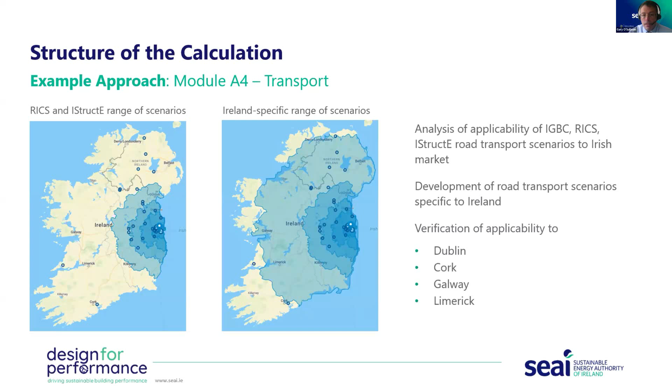As we refine the calculation towards a final result, and we have information available from the contractor, that detail can be supplemented by actual transportation modules and distances, but again applying the same factors that we will have arrived at in our calculation manual.

Currently we are in the process of reviewing a further engagement of consultants to generate the generic database, and that review process is ongoing at the moment. It's anticipated that we will hopefully be appointing somebody in the next week or two to produce a generic database for the country.

Another ask is that currently the EPA produce CO2 emission factors for various different fuels, both liquid, solid fuels, and electricity. However, these values only account for the CO2 emissions associated with the combustion of those materials at that source, and they don't include factors for well-to-tank in totality.

To that end, we have a second RFQ which is published to engage consultants to assist us and generate values. These are key values that will be applied to module B6, the operational energy use, and will account for all upstream embodied carbon emissions.

I think the important thing is transparency is key to the calculation methodology. We need to know what's in the calculation, what's out of the calculation, and how things have been approached by practitioners.

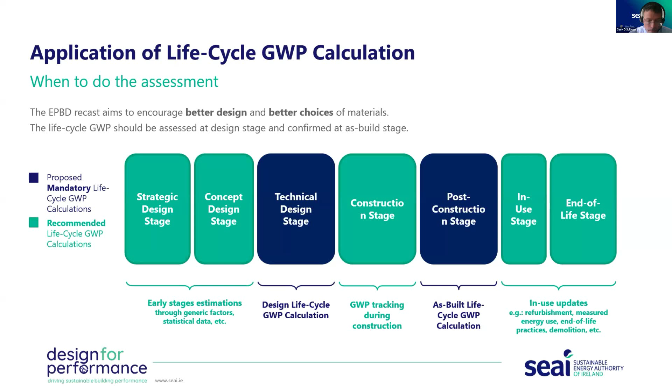But nonetheless, there's a deficiency of raw data out there at this moment in time to inform us as to where to go. So we need to collate all that and go forward with that.

Just to summarize, I suppose the key messages of the presentation: the life cycle global warming potential is a new requirement, Article 7.2 of the recast EPBD, including both operational and embodied emissions over the totality of the life cycle of the building.

We need to notify the European Commission of a roadmap. This will outline how it is we are going to arrive at setting limit values by 2030. It won't be informing the Commission of limit values, but rather the roadmap, and that needs to be done by January 2027.

We will be required to publish these values for all buildings in excess of 1,000 square meters, all new buildings by January 2028, and for all new buildings by January 2030, with limit values set for 2030 as well.

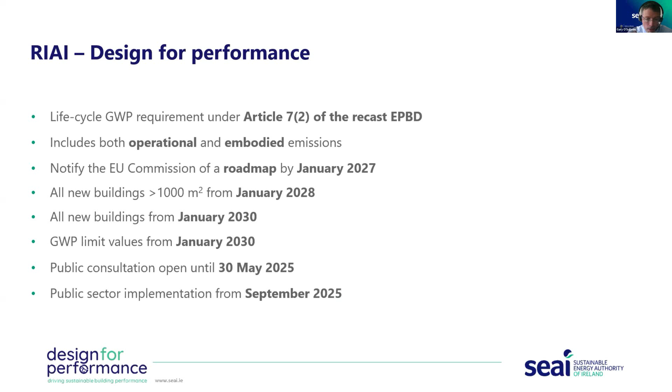I mentioned that we have a public consultation ongoing at the moment. It's available on the SEAI website. Its closing date is the 30th of May 2025. We'd welcome and encourage people to visit the public consultation page, download the documents, and we welcome any submissions that will help further development of this calculation methodology approach going forward.

Maybe just about on time, Liz, am I? That's lovely. Thanks so much, Gary.

We do just reiterate, we really welcome and would encourage people to download the documents, review them, and come back with some comments and suggestions. We intend to collate all those, and we will publish the findings of that consultation process on our website as well. Thanks.

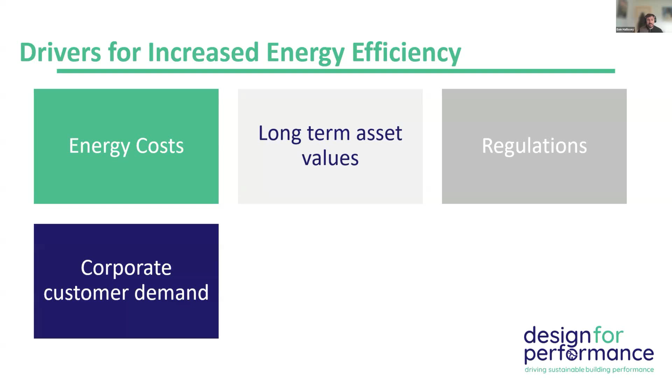So we'll look at how we can meet increased valuations by improving beyond that. The regulations, as I mentioned, have been driving energy efficiency across the built environment. Corporate customers, we've seen a big demand there. And then finally, banks and institutional investors are being mandated to report more and more on what they're investing in and what they're lending to in terms of sustainability.

They're also being incentivized in terms of finance, both from the bond market and from the European Central Bank, in terms of green bonds, for example, which might have a discounted yield versus straight vanilla bonds. So they're increasingly looking for ways that they can invest and lend to green projects that can be proven to be green.

And that's really driving, I think, a lot of the efficiency through in the market. And that was definitely the EU's intention anyway.

So to move on to that now, the EU itself, just the sustainable finance policy, it's kind of come down the line from the Green Deal, which we spoke through today. And just looking at the context again, why is the EU focusing on sustainable finance? They have the need to drive private capital towards their policy objectives. It can't just depend on funding from the European Investment Bank or other state bodies.

There's the systemic financial risk from climate change in that if we've massive exposure to properties which are not adapted to the problems of climate change, there's potential for asset stranding, which can cause severe losses on banks' balance sheets, which, as we've all seen in the last 15 years, can cause bigger issues down the line.

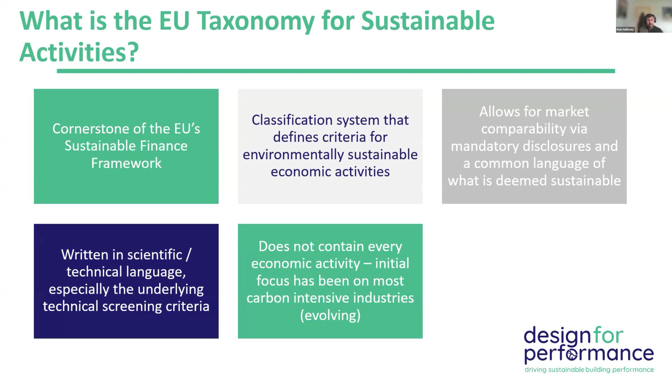Doesn't contain every economic activity, but it is evolving. And then again, it doesn't tell you what you can and can't invest in, but essentially it's that nudge piece to try and nudge investors towards that goal.

So how does taxonomy work? Which is interesting. For the activity to be considered aligned, there's kind of three main criteria, as we'll see in a second. It's very prescriptive, technical for the most part. As I said, it's step-by-step prescriptive steps of what you must show to prove you are taxonomy aligned, and there's very little gray in it.

It's yes or no. And then companies will have to translate their taxonomy aligned investments into their financial KPIs. So they will report what percentage of their revenue or their capex is taxonomy aligned, or financial institutions might report, simplified way of putting it, what percentage of their loan portfolio is taxonomy aligned. But again, we'll just try to stick to the practical steps of how you show your taxonomy aligned today.

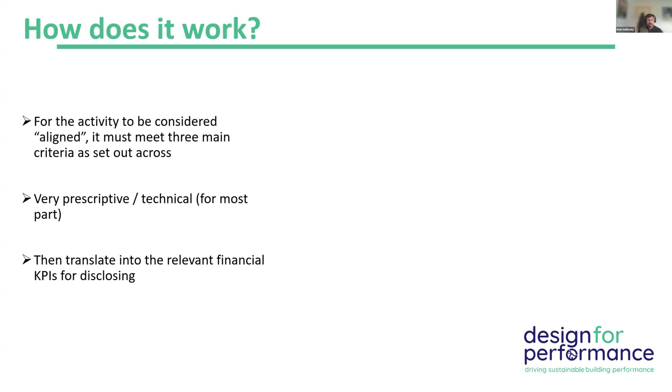So first piece is you must show that you're making a substantial contribution to one of the six criteria. So again, any project will be kind of focused on one of these six criteria: whether it's climate change mitigation, adaptation, water, marine resources, circular economy, pollution prevention, or protection of biodiversity. That's the first step. You must show that you're making a substantial contribution, and what a substantial contribution is is very clearly defined, dependent on your business activity.

Number two, you have to do no significant harm to any of the other five criteria. So if my climate change mitigation activity is polluting a waterway, then I'm out. I'm not taxonomy aligned. So you can't just build a building that meets the climate change mitigation criteria but is actually causing harm in one of the other places. So that's a key part of it.

And then there's the compliance with the minimum safeguards, which is around human rights, the social side of it. They're linked to the UN guiding principles on business and human rights and the ILO declarations. And that's one where people have definitely struggled, because to meet that standard you really almost need to be completing human rights due diligence in your own business and through your value chain. That is definitely one place where I would suspect there might be some simplification.

Because it was actually linked closely to the EU's corporate sustainability due diligence directive, which has been pushed back a bit. So the fact that we don't have mandatory reporting under the CSDDD, the due diligence directive, definitely makes compliance with the minimum safeguards harder. So if there is going to be simplification, I would expect to see it there. But then that's the overview of how it works.

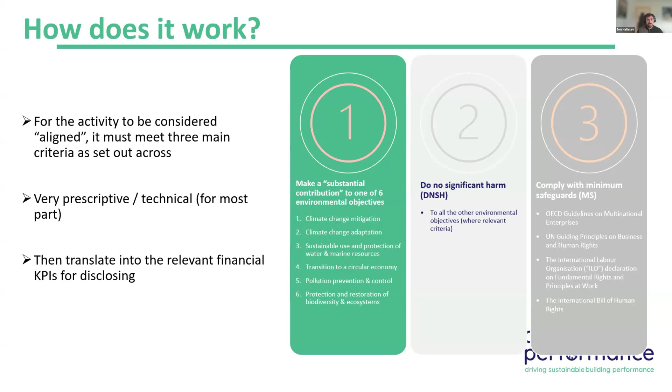But now we'll just go through a worked example of the actual construction of new buildings piece. So again, first up, we need to make this substantial contribution phase. And for climate change mitigation, there's three potential ways you can do that.

Your energy performance on your energy performance certificate can be 10% less than near zero energy building requirements. So again, just showing that building regulations aren't the standard for sustainable finance here. We're kind of going beyond the base standards, and it's really clear that the EU has set higher standard regulations on purpose. So it's great that we're all meeting NZEB requirements, but NZEB minus 10, now taxonomy is demanding that. So that's an interesting one.

And that's, again, when we're looking at any residential developments, that's a standard that needs to be met. For larger buildings, I think it needs to be both air tightness and thermal integrity standards, and then the global warming potential needs to be calculated as well for each stage in the life cycle, and again it needs to be disclosed clearly.

The most common one we have definitely seen is number one, because a lot of the focus in the developments has been around the housing market. So the energy performance piece is one that has come up a lot, but again, it's just showing that it's going beyond current environmental regulations. Green can't be the base standard. If you're going to be benefiting from being green, you're going to have to push beyond that. So it's interesting to see that they're trying to push the financial market that way.

And the second stage is the do no significant harm, as we mentioned. You've now proven that your building, house, or office block is going to make a substantial contribution to climate change mitigation, but you have to prove that you're not harming any of the other five criteria objectives. So in climate adaptation, you need to have carried out a physical climate risk and vulnerability assessment, and it's really prescriptive of the steps you need to take. You need to consider your short, medium, and long-term risks within that, and any site would probably have to have that to prove their taxonomy aligned.

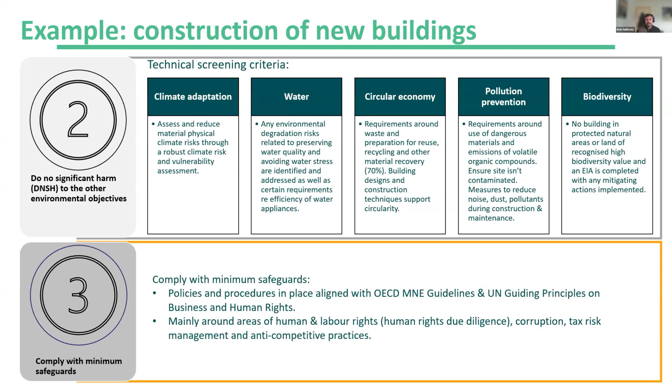So the next piece is just around certification of taxonomy alignment. The question again at the start was, can we self-certify it? But I don't know many banks who will allow you to self-certify anything that they're giving you a margin discount for. Will existing frameworks be amended to enable the certification?

There is definitely a lot of overlap between BREEAM and LEED and the taxonomy, but even though the European Financial Reporting Advisory Group were asked directly on this, they have been kind of unclear in their answer. Just because the taxonomy is so black and white, they don't necessarily always map directly. And in terms of actual certification, there's one company, DGNB in Germany, who have been carrying out certification across the board, and they're still in that space.

And even within the Irish market, we've seen Lioncor announce that the Glass Bottle site, which is in Ringsend, they're going to be fully taxonomy aligned, with the aim of including that in green investment funds. So that's one Irish example straight away where we've seen it in place. And just to look at the Irish market beyond taxonomy.

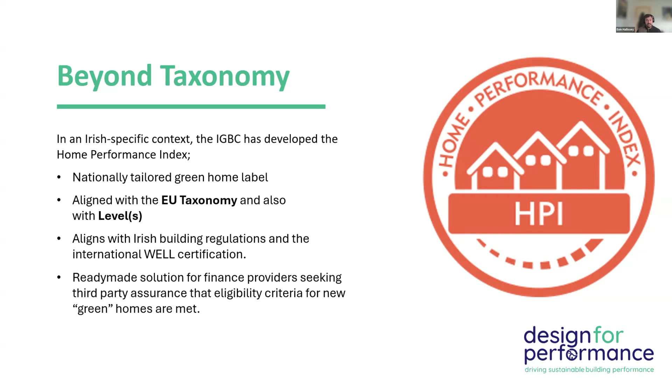One last piece on the HPI is just around HPI-linked financial products that we've seen. This is kind of the most practical piece from today, in that I've seen advisors and solicitors talking about HPI being referenced as a marker within term sheets for new developments for loans. And the lending market is definitely still developing - there's been a lot of improvements in the last 2 to 3 years since I was last working as a lender.

But back then, even target setting wasn't really considering factors such as materiality, whereas it was down to individual negotiations, and targets were set. But probably there wasn't necessarily materiality assessments carried out - they weren't necessarily in line with the sustainable loan principles. So that was the key part there, in that if you want your loan to be truly sustainable, you need to actually make sure that any linked targets within that are the most effective and most impactful for your business. So the HPI has almost taken that step away from the market.